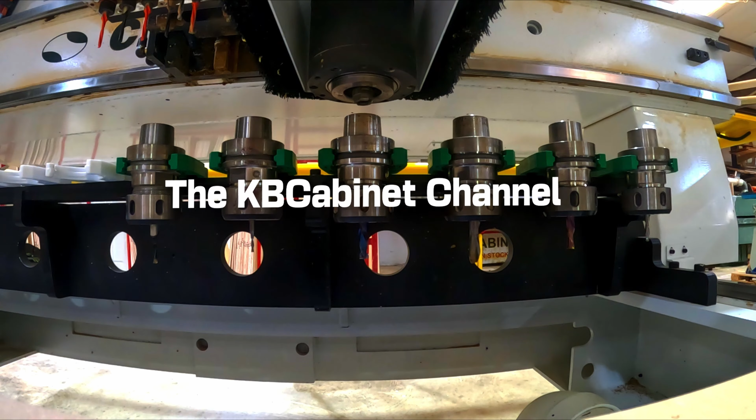When it comes to MDF doors, the shaker style is no doubt one of the most prolific designs out there, and that's for good reason. It looks nice and it's relatively simple to set up, but eventually you might come to a point where you want to offer a little more to your clients than just the simple shaker door. That leads you to start adding new tooling to flavor it up, so to speak. So in this video, I'm going to walk you through how I set up an inner bead, or inner rollover, whatever you want to call it, on the inside of an MDF shaker door. I feel like it's the next logical, technical progression, without getting too crazy.

We're going to take a standard shaker door and just add a little profile to the inside. So with that being said, let's take a look at the tools that I'm going to be using.

First one right here, we've got a diamond blade hogging tool, and this has been a fantastic tool that I've been using for a couple years now. I purchased this one from Dylan over at Mid-America Woodworking Machinery, and I've just been really happy with it. So we're going to use this to do our main hogging.

To get our shape in the center, we're going to be using these two tools here, and these are both from Vortex, and they need to be bought together. They're made to work together, and I believe these actually come from the raised panel kit, but I'm not using the actual raised panel part of it. We're just using these for the inner bevel. The reason these have to be bought together is because this one goes first and starts removing the bulk of the material, giving it the shape, and then this one comes behind it with the nice point and cleans it up. There's probably other tools out there that will accomplish the same thing. I just happen to be using Vortex tools because I have them on hand.

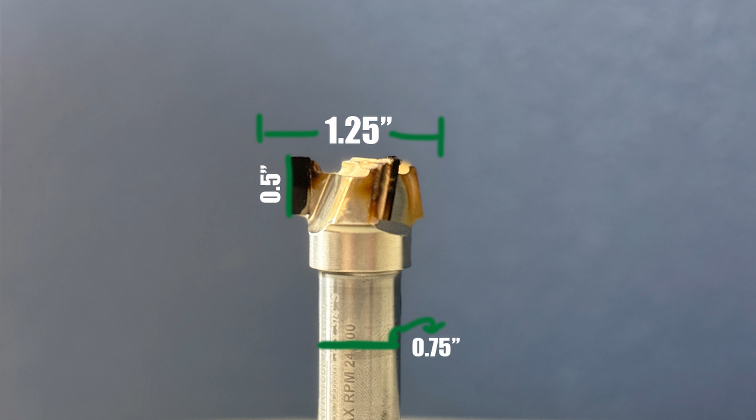So inside the tool shape editor, I'm going to admit that I do not like this. I feel like it's kind of unintuitive, but we're just going to do the best we can. So here is our tool, and I'm going to throw a picture up on the screen. You can see that if we take a look at the tool, we've got 1.25 inches in diameter, and then we've got a 3/4 inch shank, and our tool height is a 1/2 inch, or the blade thickness of the blade is a 1/2 inch. So how do we recreate this inside this tool shape?

Currently, if we look over here, our grid unit is set at 3/16, and that means these are 3/16 by 3/16 squares. So what we're going to do is change these grid unit sizes a couple times to accomplish what we want. The first thing we're going to do is tackle the width of this tool.

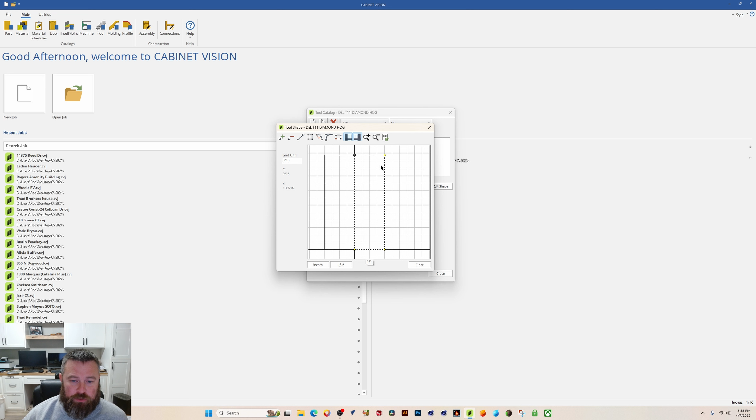So what we're doing here is we're only drawing the right side of the tool, and then Cabinet Vision will apply that to the left side. So if our overall diameter is 1.25 inches, if we come over the radius of that, which is 0.625, I believe. Let me look at my trusty metric conversion data.

So 5/8 of an inch. We're going to come over 5/8 of an inch, and we're going to make these squares, 5/8 by 5/8 squares. That gives us our diameter, and if we add this right side to the left, we will get our 1.25 inch diameter. So right now we're already good with our diameter. So now we need to come up a 1/2 inch because that's the thickness of our blade.

Let me just check something real quick. If I change this to 1/2 inch by 1/2 inch, we can see that this stayed at the 5/8 point, and I believe it's because when we put in the tool diameter here, that is driving where it initially starts out the width.

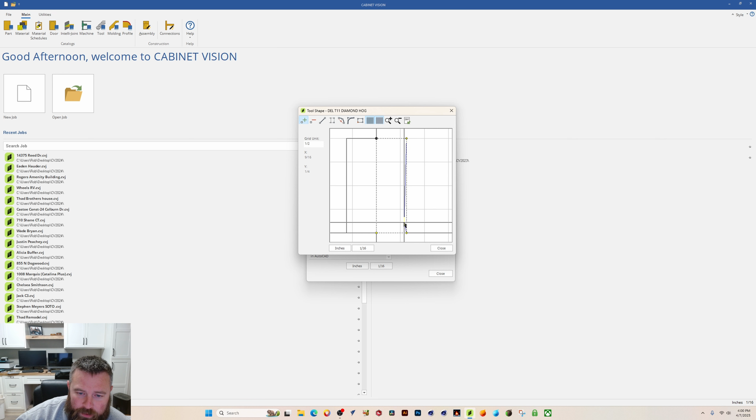Now we can add a point here, you click the dotted lines, and it allows you to add a point. We've got to turn off this snap to grid, because it's going to want to snap only to the grid points, and we don't want it to do that. So let's put that about right there.

That is the height of our tool blade. Now we need to come back this way half of the shank, which is 3/4 of an inch. So we're going to come over 3/8 of an inch, so that is 0.375.

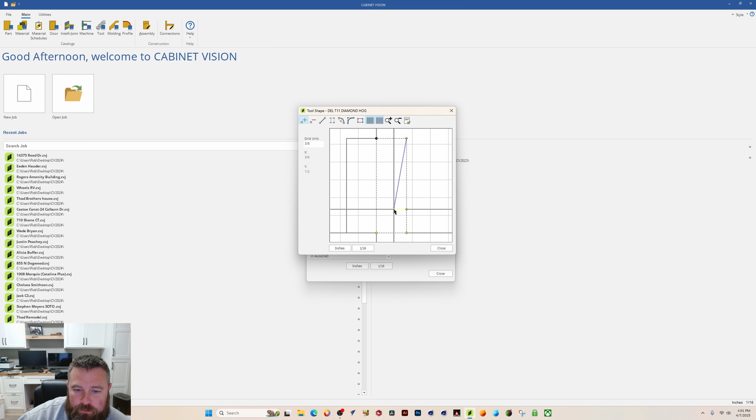If we do that, now we can come all the way to this point here. So let's do just like that. And then let's move this guy in line just like that. And that is pretty much it.

It's pretty straightforward when you're doing these square shapes. It can be pretty annoying, but if you experiment with it and mess up, just hit close and say no to this save tool shape, and you can start over. But in this case, we're going to say yes. And we have our tool shape that's pretty accurate for the diamond hogger, and we can use this in the simulation.

So now that we've got the hogging one out of the way, let's move to the 1/8 inch end mill, and we'll get that set up. So let's add this 1/8 inch end mill.

So again, we're going to create a new tool, and I'm going to name this DEL, so I know to delete this after. This one's going to be T5 because this is going to go in tool slot 5 for me. And then I can put something like 1/8 end mill, something very simple like that. So when I look at it, I know it's T5 and it's an 1/8 inch end mill.

So for type, again, we're going to go to flat router and we're going to hit OK. Same deal as before. So the only things I've got to change, I've got to put 5 for my tool number, 5 for my height offset ID. Diameter, we can do 0.125 for 1/8 inch.

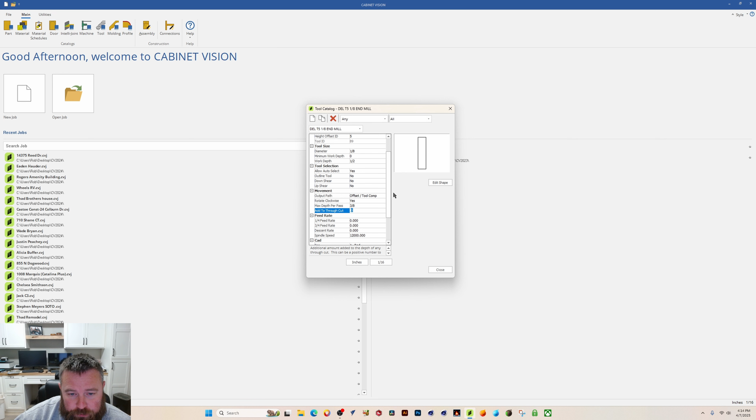So the feed rate here, for this first one, we're going to do 150 for the 1/4 inch, and then we're going to cut that. Actually, we're going to go 10 for the 3/4 inch feed rate, and then I'm going to do 75 for the descent rate, and then I am going to leave the spindle speed at 12,000 RPMs. Again, I'm not going to do anything down here.

So if we edit this shape, let's do, if we make that an 1/8 of an inch, or actually let's make this a 1/4 inch.

What do we say? This is an 1/8 inch end mill, so actually 0.0625. We need to make this a 1/16. Okay, so if we change this to 1/16 grid unit, we can see that we're good here, and we're good here with the other 16th.

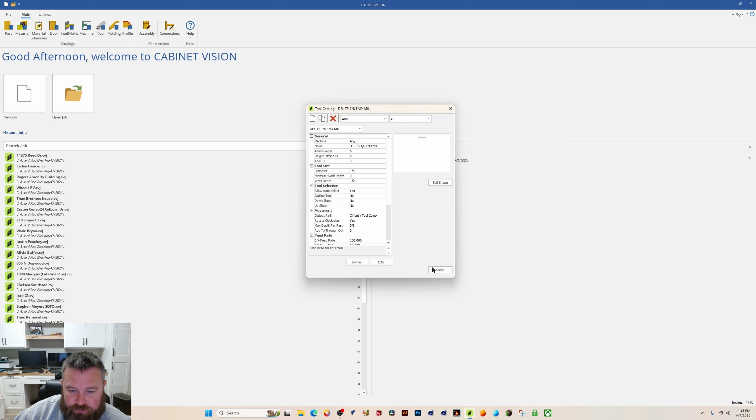So we actually don't even need to edit that shape. It's fine just the way it is. So we're gonna close this out, and now I guess we'll bring it back up. Now we're going to go to the shape tools, and we're going to start adding these tools that are a little bit more complicated shapes.

So let's add one of the shape tools. What we're going to do, I'm going to come to the internet here, and we're going to add first, we're going to do this guy first. So this is the first of the shaping tools, and so it's the 7964. So if we come back into Cabinet Vision, let's create a new tool, and I'm going to name this.

Start out with delete. This one is going to be T9 because it's going to be tool 9, and we're going to go ahead and put, I'm just going to put the tool number for this one. So it's tool 7964, and I could even put something like this, like vortex. Maybe I should have put vortex before to break up the two numbers, but that's good enough for now.

So let's go to type, and we're going to go to shaped router, and we're going to hit OK. All right, same deal as before. I'm not going to do anything here. We're going to put tool number 9 here, tool number 9 here.

The diameter of this tool is actually, I'm going to go 30, it's in millimeters. I know it's 31 millimeters, and then in inches.

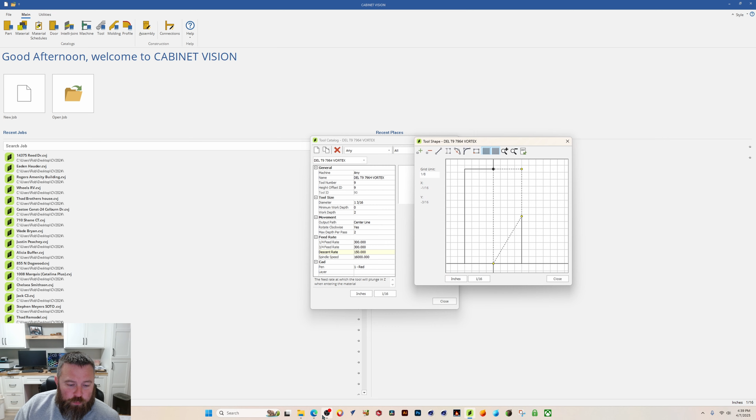If we go to the internet and we go back to this tool on vortextool.com, we have this product drawing and dimensions PDF. So we're going to pull this guy up, and we're going to kind of have this help us a little bit. We've got some information, like we've got the radius here, and I think it gives us enough to get it mostly done. The only thing that I don't see is it doesn't really give us a radius for these little notches right here. So I don't know if I'm going to worry about that too much or not.

So to start, if we come back into Cabinet Vision, let's think about this a second. We're going to be jumping back and forth to this page into Cabinet Vision, so I apologize for the back and forth, but it's just easier for me to look at this and then jump back into Cabinet Vision. So the first thing I want to tackle is this guy right here. If we're coming down our center line, let's do this guy right here.

So if we have 0.466, and that's from here to here. If we go 0.233, that should get us this little dot here. So let's go 0.233. I'm going to go to this grid unit, and I'm literally just going to put in 0.233, and let's add a point right there.

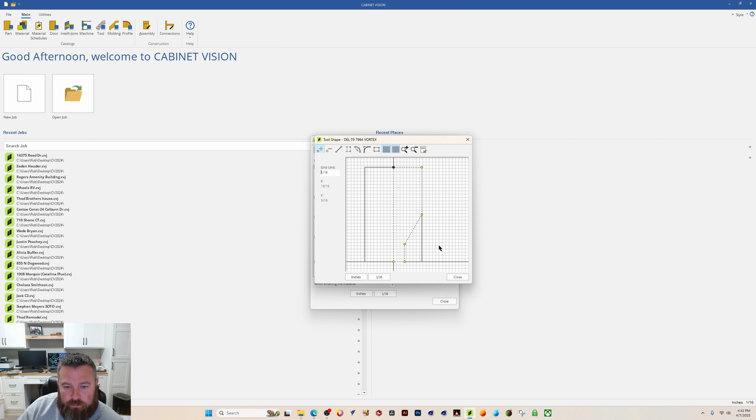So from here to here, we're at 1.216, so we need to cut that in half. Let me whip out my calculator on my phone. I'm literally just taking 1.216 and dividing it by 2, and that gives me 0.608. So if we come to 0.608, just like that.

Now if we create a new point, just like that. Okay, so how do we get that radius? We're going to come up here to radius point, click this point, and type in 0.375. We're going to hit OK, and there we go. So that is giving us that radius.

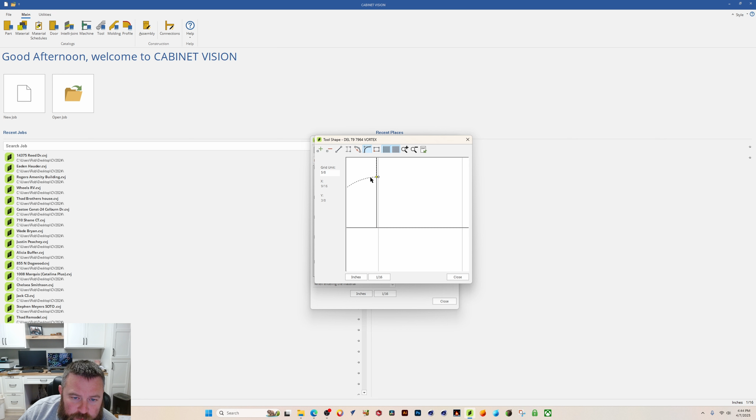And it looks like, let me zoom in on this a second. I couldn't tell if that was a point or if that was just part of that radius. Okay, so we've got that radius.

So let's go back here, and we've got this little radius here. I don't really know, it's not giving me a radius, it's not really giving me a distance. So we could get away with either not doing it at all, or we could kind of guesstimate. And again, this is for like an X simulator, so it's how accurate you want to be in the simulator. But if we try to put this in, let's say this point, 1.281 is from here to here, and then this point, 1.216, is from here to here.

So let's take that point, or that's that 1.281, divide that by 2, that gives us 0.6405. So if we come back here and we put 0.6405, then we know how far we need to come over, but it doesn't really give us a height to go up. So I'm just going to do an arbitrary number that looks like it might work, and we can move it.

We might have to zoom in a little bit here, and then let's add another point here. Well, let's... and then we'll move this guy over here, and we can give this guy—I don't even know how much of a radius to give it—0.05 maybe.

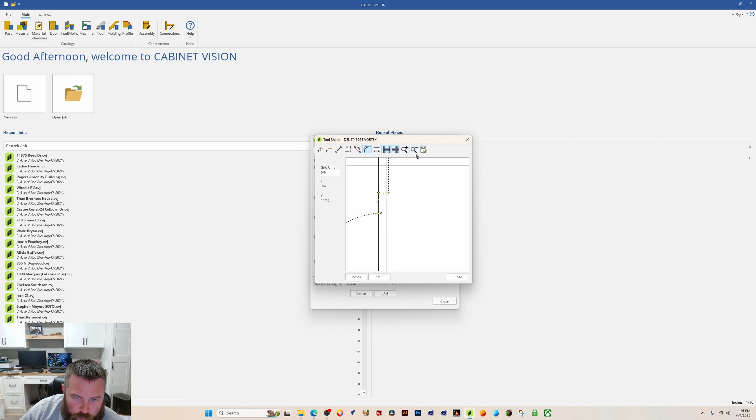Let's see what that looked like. Maybe that was too much. That looks like it might work, I mean that will be pretty close. So we're gonna roll with that.

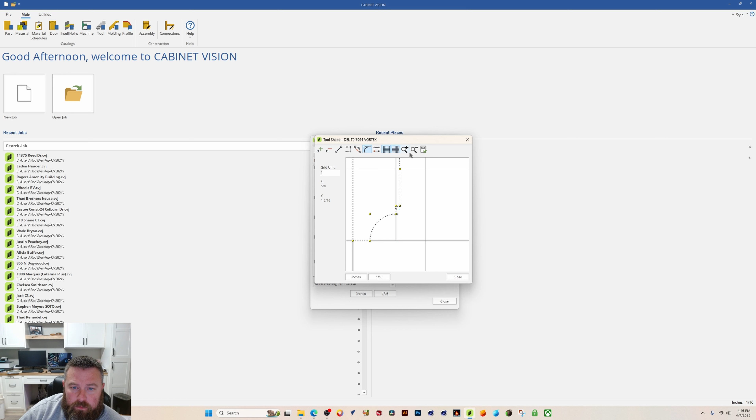So now let's go back and take a look, and we can see that it comes up about an inch or so, 1.009 from this point. I'm not going to worry about it too much, I'm just going to put an inch on the grid unit, and we're just going to call that good.

So what I'm going to do is put this guy right here, we're going to do another point like that, and then I'm going to move this guy above it like that. Okay, I don't know why it put that point, but I'm going to remove that point.

So this is a lot of just tinkering. I like to think there's a quick and easy way to do it, but it really is just a lot of tinkering. So now if I close this and save this shape, we can look to see that it's definitely not perfect, but it's pretty close. I would say it's a pretty accurate depiction. I know we've got this radius correctly, we've got the diameter, and we've got the radius here.

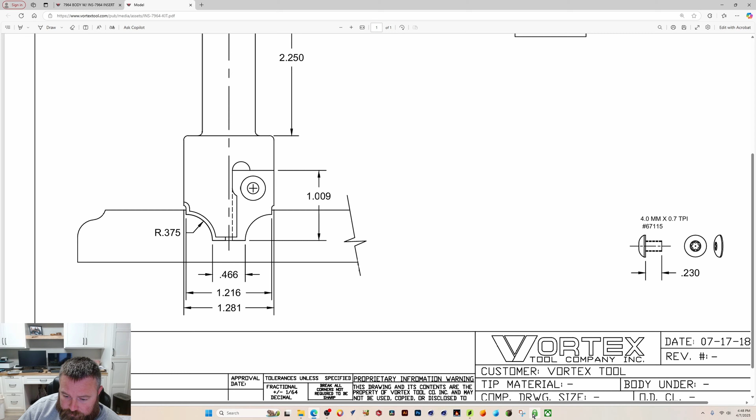So we've got enough, it's accurate enough that I'd be pretty confident this would work out. We could go in and tweak that a little more, but I'm not even going to worry about it for this. All right, let's move on to the next shape tool.

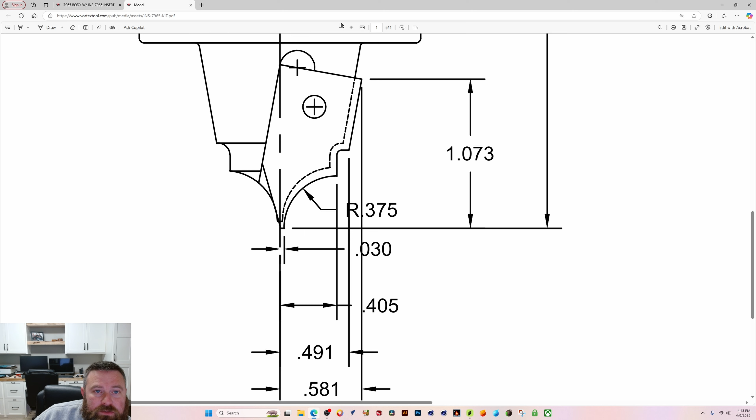Now we're going to take a look at getting this guy into the library. This is tool 7965. Again, we're going to come down here to the product DXF or PDF, and let's take a look at what we got. So we got the whole tool here, let's zoom out just a little bit. All right, so we got some information to work with.

So let's go ahead and create a new tool and quickly give it a name. We're going to put DEL, this one's going to be tool 8, and we're going to call this Vortex. And this is 7965. Let's make this a shaped router and click OK.

Let's quickly go down the list. This is going to be 8, 8. So the diameter, I'm going to go with this 0.581 because we're only cutting with this shape. Maybe this is a radius, I don't know, I really don't know. So this 0.581 is what I'm going to use.

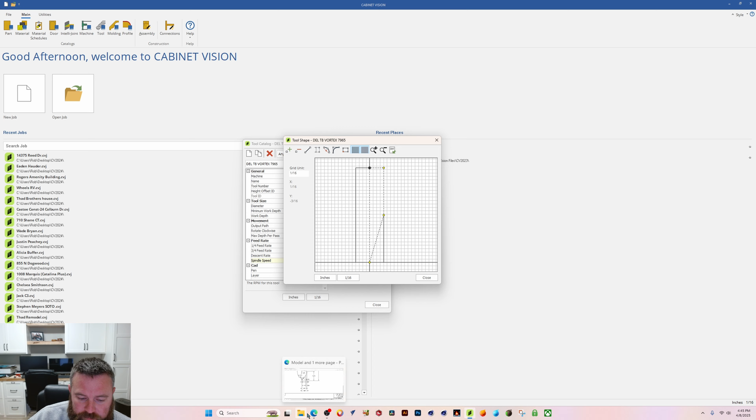So it looks like we've got some dimensions from this tip here, so I'm going to start at this tip and we're going to work our way to the right. The first thing I'm going to do is take this 0.030, and we're going to zoom in on it. This is where I wish this thing went full screen, it is just frustrating that it doesn't. But let's add a point right at this grid, we just basically want one grid space over, and that's going to give us our little point.

So now that we have that, we have this radius of 0.375, so let's go here and put 0.375. And I'm going to turn that off, let's zoom in. Well, let's see if we can kind of zoom in on this region.

Maybe that was good enough. So I'm basically going to add a point, and let's go right above it at that line of 0.375, just like that. And then I'm going to go over to the right to this 0.4, or right here, is it this guy? So is it this guy? And right here, I think this one is the 0.405, so let's go 0.405.

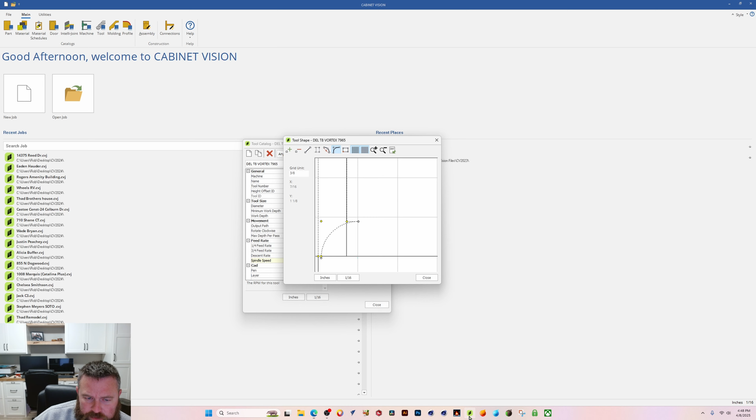All right, so we've got this, we've got the radius, and then now we need to come up, and then we've got this little radius here. I don't know how high this point is, I don't think. I don't see anything, but we know from here off the center, maybe it's that 0.491.

So I guess I'm just going to kind of guesstimate maybe 0.125 distance to go up. I mean, I guess I could get calipers out and go get the tools and measure this distance, but I think for this I'm not too terribly worried about it. Let's say that this is maybe like a, let's see if we can deduce like a 16th or something. Maybe I will have to get calipers eventually, but I'm just going to kind of say like a 16th for now, or maybe even like an 8th.

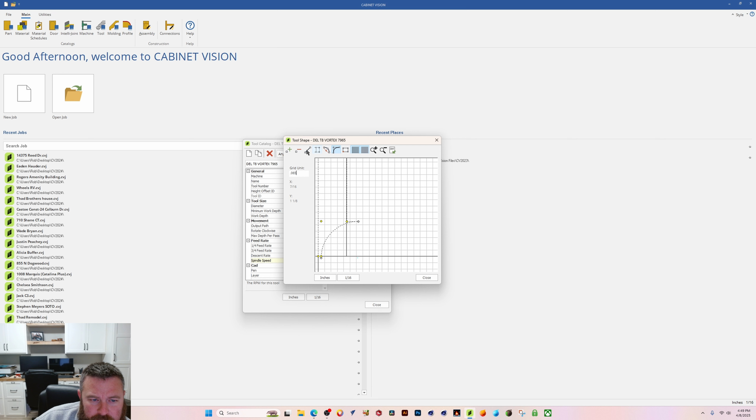Let's go back here a second. So let's just do like a 16th. Maybe. And let's take...

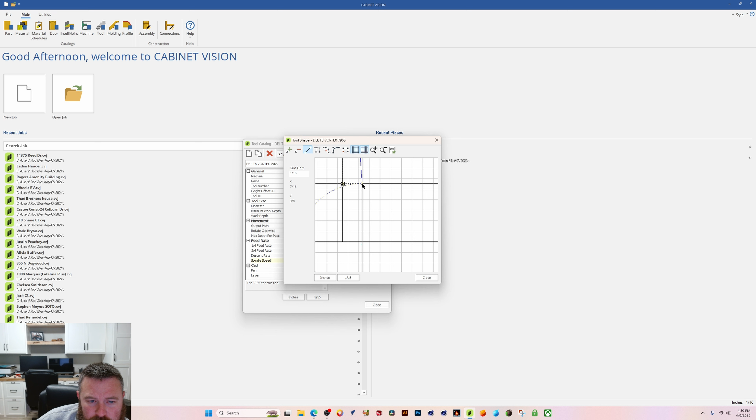Okay, so how am I going to do this? I think here's where it gets a little tricky. I can't really move this point, I think. So let's move that guy to there. It kind of overshot it when I did the radius, so it was going to move it wonky. So I moved that point out to it, and now—no, I keep zooming in and out, it's probably confusing. So now let's add a point, and let's just go like right here.

Maybe right on that line. Well, I keep adding a point when I'm doing that. We want to move this point, we don't want to add. So just keep that in mind. Yeah, every time I click that with the plus, it adds a point. Okay, so let's just keep that for now at that 16th.

And then if we come here, I know that right here, so 0.491 is the distance from here to where the edge of that is. So let's come here, let's go 0.491. And let's zoom in, and let's add a point right there.

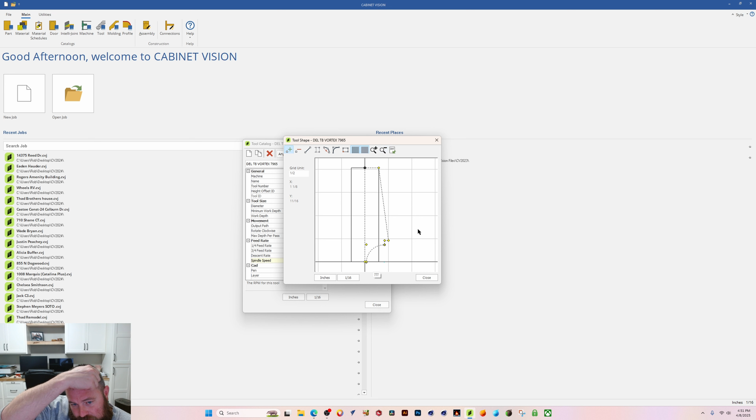And if we zoom out, maybe that's not quite tall, maybe that needs to be taller. So let's actually, I'm going to move this up just a little bit. Again, I'm not ultra worried about this shape. I mean, once we start running it, we're going to really figure out if we're close or not.

So then now let's put a little radius on this guy. And again, I have no idea what to put, so let's put like 0.05 maybe, something like that. I think that looks pretty reasonable.

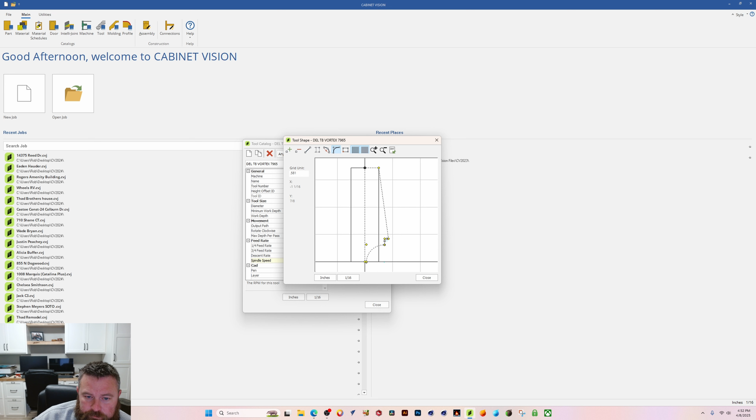And if we go—so the last thing I got to do, we're going to do this point, so 0.581 first. So let's put 0.581. And we know that we're going to come out.

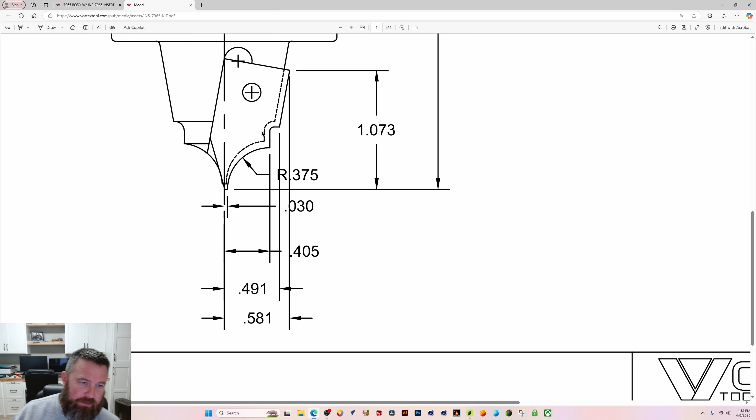Let's add a point. Okay, let's just do this for a minute so you can kind of see my reasoning. So we know we're going to come out like that at the angle. But, you know, I guess I would need to get calipers, maybe I should have had calipers to do this. I'm making this video because maybe it looks like I don't know what I'm doing, and I probably don't for the most part.

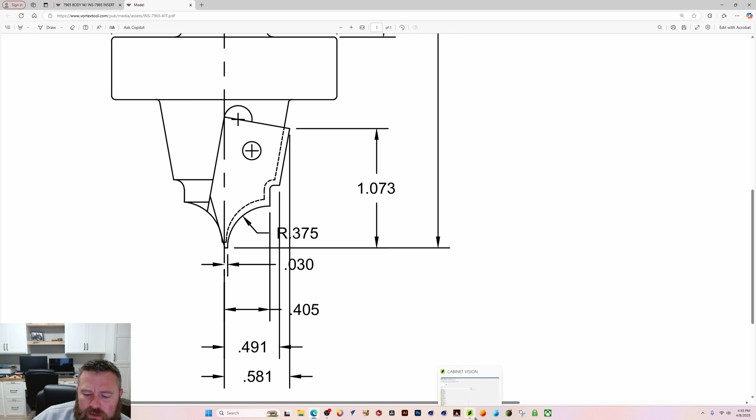But let's just say that this, if this is basically like an inch, maybe this is like a half inch. Maybe that's just straight, we're just going to call it, we'll do this—let's go 3/8, maybe.

And actually, what I need to do, I actually need to leave it at that 0.581 so I know where I'm at there. So we'll just lower it on this line, maybe. I don't know, something like that. I think that's going to be good enough for me.

And then what we can do—so I'm not even going to go into, there's no need for me to really design anything beyond the point that we're at. So to finish it off so it looks nice, maybe we just come in like...

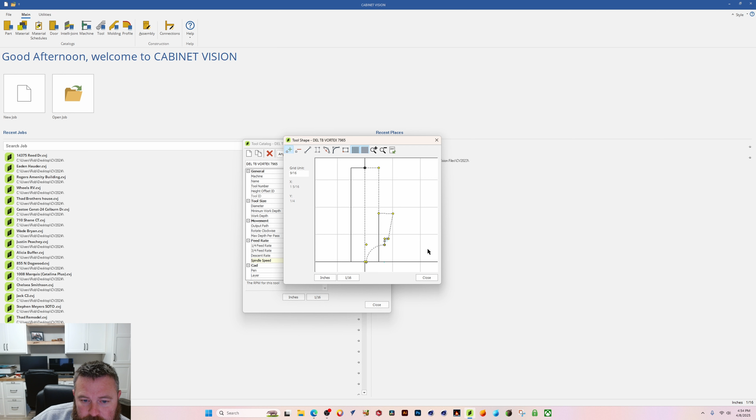So we could do something like that, and then if we close and save it, we can see that more or less we have the shape of our tool, and we've got that little tip there, and then we've got that little...

So I think between tool 8 and tool 9—tool 9 looks really close, tool 8 I think that looks really close, and in fact it's more than close enough for us to get started running it in the real world, and then we can make changes that way. So I think we're good.

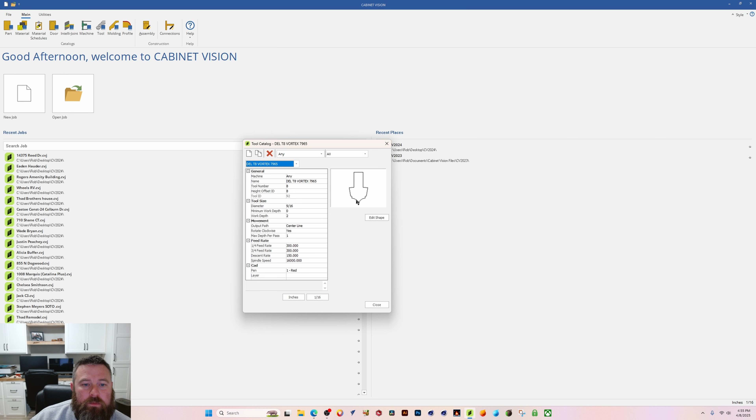So now we've got all the tools in. The last tool, I'll cover it—I'm not going to put it in since I already have it in. It is my T4, that 3/8 compression, this guy right here from Nick Frost. I'm just going to throw this one in for the sake of time on this video. This is the information I have for this compression, so I'll just go slow if you want to pause the video and look at it.

These are my feeds, my speeds. These are what I use day in and day out, and I wear these mofos out. So if you're running a similar machine, this ought to get you pretty good results.

So now that we have all these tools in, we can move to creating a tool set. Let's start making this tool set. Before I get started, we're going to come up here to the tool and open up this catalog. But I just want to reiterate that this is something I just came up with that worked for me from trial and error. So if any of you pros are out there, don't beat me up. If it looks funny or if there's a better way to do it, this is just what I have found that works for me.

Secondly, there's a chance that I might run into this little bug that I have recently discovered setting up a tool set. So if it does show up, I'm going to show you what I found to work around it, but it may or may not work for you.

So let's come up here to create a new tool first, and we've got name and type, just like we did when we were setting up the single tools. For this one, I'm going to name this delete, and then we're going to do, actually this is not V groove, let's do shape. I'm just going to name it something so I know to look back, video test. The name is just irrelevant, it's just for me so I know to go back and delete this. But whatever your name is, name it very specific so you want it to be memorable and make sense.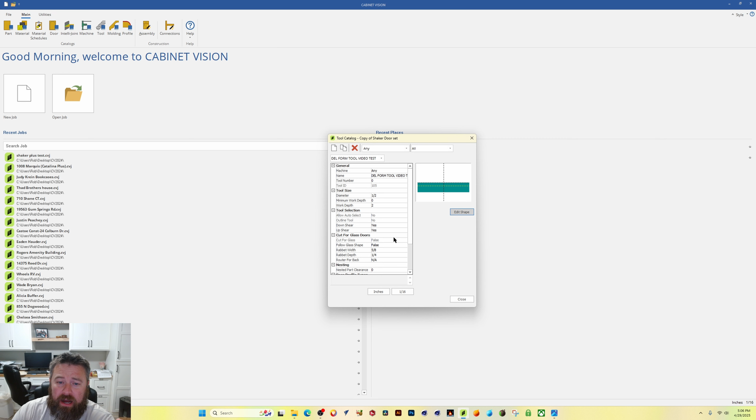Before we start adding tools, I just want to talk about the different ways that you can go about this. So when I did this the very first time, I did not use simulation that is built into Cabinet Vision. So when I first did it, I would make a change and then I would have to run it and then analyze it and make adjustments. But we're going to use simulation.

So to see if you have that under your license, you have to come up here to the little question mark, go to license details, and if you see simulation down here, then you have access to it. If you do not have access to it, it's not the end of the world at all, but it just can save some time getting it set up in the simulation.

It can save some time from running back and forth to the machine, so we're going to use it, but you do not have to have it. It just makes life easier. So if we go with this form tool video test, we can start building out our set.

The first thing we're going to do is add a new tool. So we're going to click this, and it'll just throw in a random tool, or a tool that may be what you want, or it may not be. From here you can drop down and select whatever tool you want from your library. In our case, it is exactly what we want.

So we're going to use this one. For the sake of time, because I know this video is long, I went ahead and made some notes from a set that I already know works. I'm going to go through these, and we'll check out the simulation in between each tool, so even though I'm not doing it entirely from scratch, because that would take way too long, you can get an idea of how to go about this.

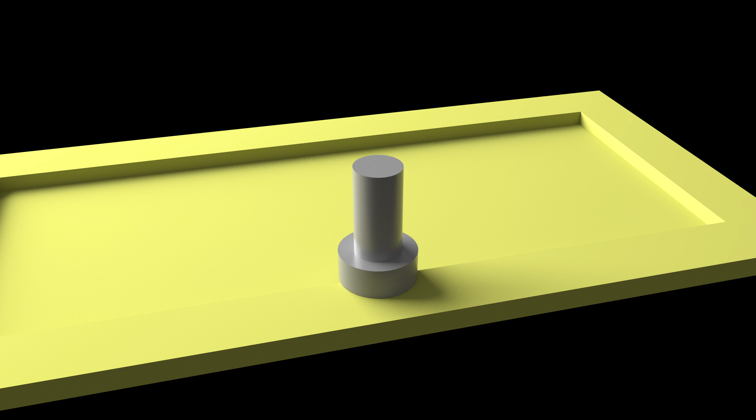So the first tool we want is this Diamond Hog. It's going to ask us some stuff over here that we need to tell it. First thing is the offset. This center line, whenever we bring this router into the world — I'm going to have a little 3D video here that hopefully helps you see where this is coming in the process, in 3D space.

So for all you visual learners out there, you can get a sense of how we have to offset this, because where it stands, the center line of this tool is lining up with the edge. It's in line with the ledge or the edge of the shaker profile. Obviously we have to move that over, in a specific direction.

If you've never done this before, I encourage you to just start putting some numbers in there to see the way it's moving. So if we move it a half inch, it moves to the right. If we go -.5, it moves to the left. If we zero it out... you can do the same for all those other ones so that you get a sense of how you're moving it.

So we need to offset this. We need to offset it to the left. How much do we offset it? Well, if we think about this logically, we want basically this edge to be over here, so we need to shift this to the left. And we are going to shift this guy to the left 11/16. That is what I use currently.

The reason there's a gap here is because this is not right on the line — as we add tools, it's going to take material off, and so we're having to account for all of these things. So we're going to use -11/16 for the offset, and the depth on this, we are going to come down 7/16.

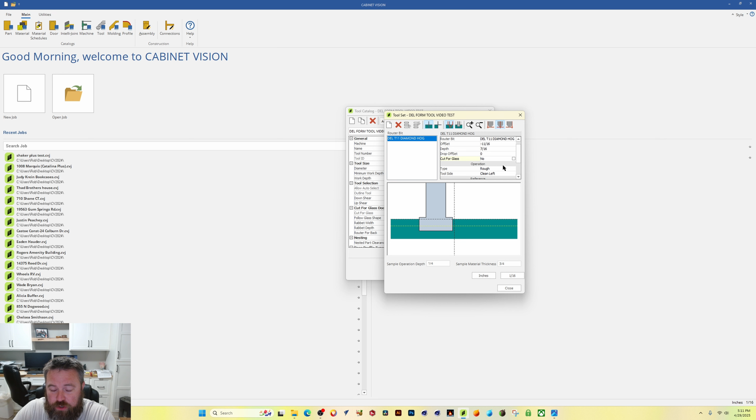Hopefully that makes sense. So on our drop offset, we're going to leave that at 0. We are going to say no for cut for glass. Operation, this is going to be a pocket, and immediately this turns gray, symbolizing that we are going to take out all the material to the left of it. Then we want our reference depth to be a fixed depth because we want it to go the depth we're telling it to, so we don't want any calculations beyond that.

So if we hit close for a minute, I'm going to close this, and we're going to just take a look in simulation one by one for each tool, so you guys get a sense of what it is we're doing. So if we go to cabinet, let's go to door — I've got my MDF shaker here on our route path. This is where I'm going to select this DEL form video.

When that error was coming up, even though I had a tool set, it was not displaying in this drop down. So I sent Cabinet Vision over all the documentation of what's happening. Whenever they get back to me and we get a solution for that, I will make an update video.

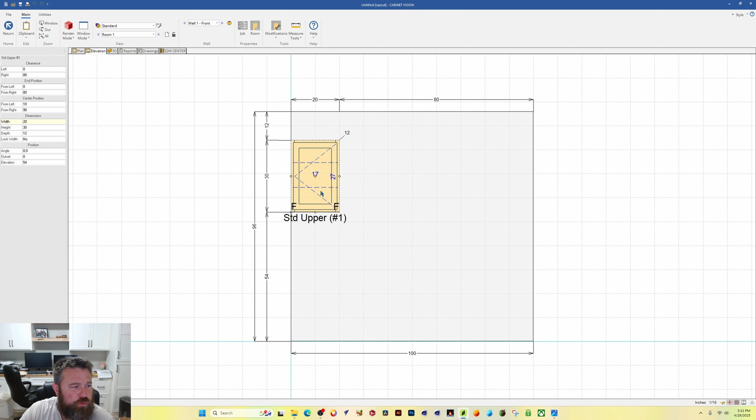Okay, if we click OK, let's go ahead and just throw a really quick cabinet in here. Object, custom cabinets. Let's just do a wall. And I'm going to make this something simple. Single door, we'll just do 20 by 30.

Okay, so I'm going to go ahead and save this just in case Cabinet Vision crashes, because sometimes it does here lately.

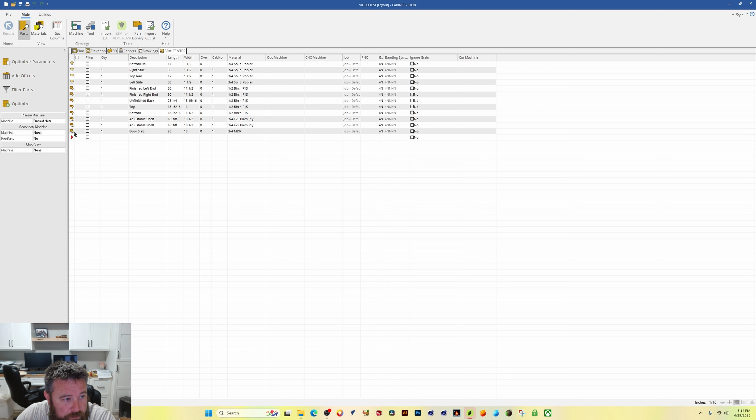All right, so let's go ahead and jump into Screen to Machine Center. And when we go to the X simulation, we should only see tool 11, or that hogging tool. All right, so we are in Screen to Machine. I'm going to check this box, and I apologize if I'm talking fast, I'm just trying to move through this. So if we hit run, I've got that selected, we're going to run that. Let's take a look at what we got.

So here is where, if you have machine simulation under your license, this is where it's going to show up. And if we click that, it is going to pop up the simulation, and we can see it's pocketing out, which is what we want. So we can look down here at the bottom left, and you can see the tool that it is calling out, so you can double check to make sure it's calling out the right tool.

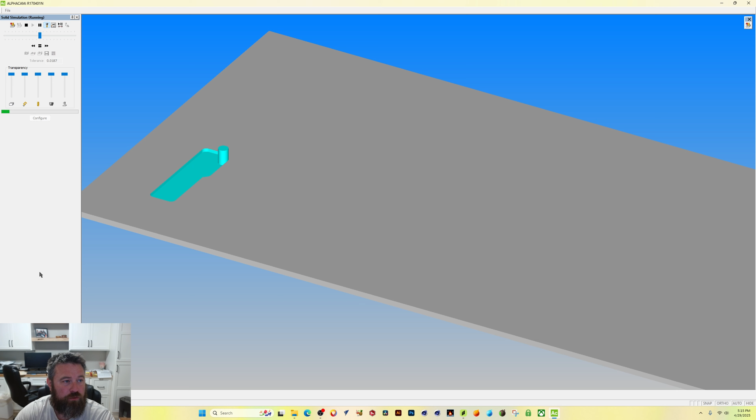And let's go ahead and speed this up. All right, so we can see that it is doing exactly what we want, and it is just the hogging, so it will maintain the exact form of that tool. So it's not going to do anything beyond that.

All right, so let's exit out of this, and let's go back into our, we got to save this, and we're going to have to close out of it. You might be able to do this inside of Screen to Machine, but I always close out of it whenever I do any of the changes.

So let's go back into that DEL form tool video test that we have, and we are going to add in another tool, and this one we are going to use tool number 9. All right, so this is the tool we're bringing in, and I don't... oh, that's just the edge of that. I was like, what is this little thing down here?

Okay, one thing to keep in mind when you're doing this, it is very important the order that you bring these in. And you can move them around the order tree here, but I've got 11, and I need this to be at the top because I want this tool to be first. Now I want this tool to come in behind it.

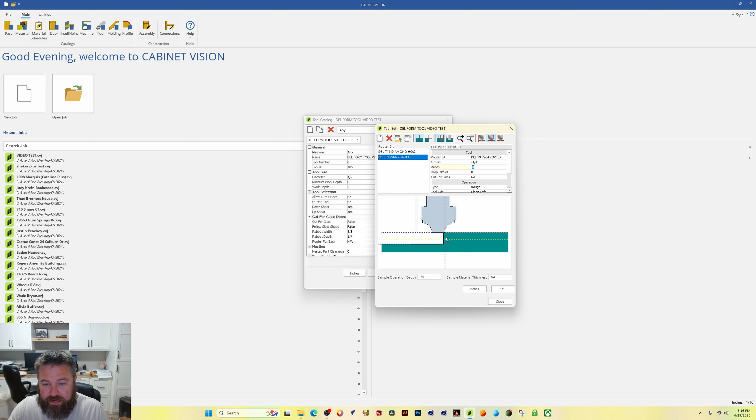So the same deal as before, we have to come in and start giving it offset, depth, and an operation type. So this guy right here, we are going to offset this guy -1/4 of an inch. All right, and so if you can kind of see, we need to get the entirety of this blade in.

And again, we're just kind of getting a good base going, and then we're going to run it, and then we can make any adjustments. But we need to make sure that we are clearing some material off. So that's why I'm going 1/4.

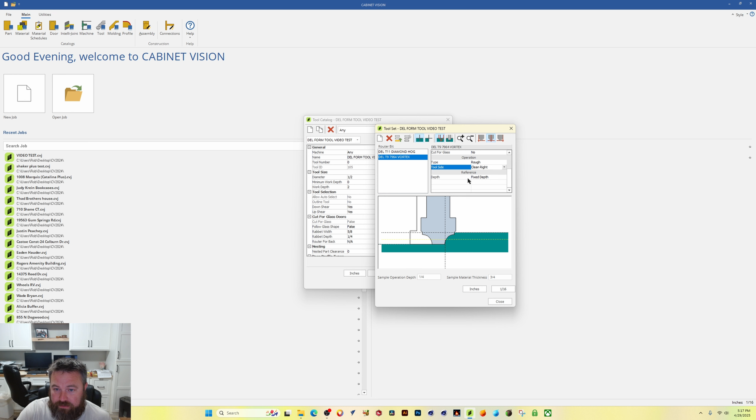The depth, we're going to still go the 7/16. We are not going to do anything on the drop offset, the type. We are going to do this one's going to be a rough pass, which means it's going to go all the way around in a line. And we are cleaning up the right side, so we want that right side. Well, the tool's cutting on the right side, so we need clean right. And at the same time, we're going to leave the reference at fixed depth.

So now if we close that out, let's go back into the video test. We've got to save it, and we're going to have to update the doors, I believe.

Okay, so now if we go back into Screen to Machine and we run that same process, we should see after it calls the tool 11, it's going to call tool number 9, which is the rough, the first shape of this profile we're doing. Okay, so we're going to go back to that door slab, we're going to optimize again, and let's go back to the machine simulation and see if it... Might have to click that first so it knows what to simulate. All right, so let's speed it up.

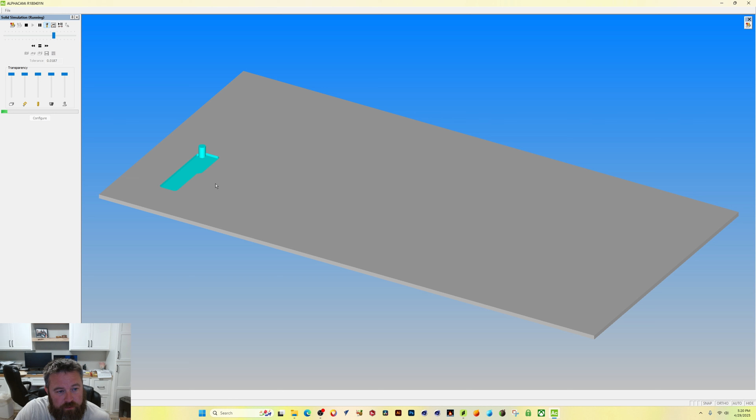All right, so it looked like it grabbed that tool, T9, so that looks pretty good. And the accuracy of this 3D shape goes back to when we set it up in the tool. So that's where, if you're using simulation, you want to be pretty precise with how you set that up, because it'll make your life easier in here.

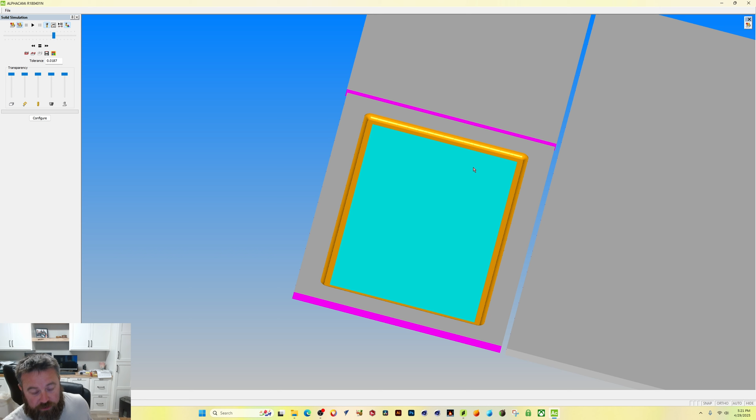And just to reiterate, if you don't have simulation, this is where you would go out and run a test part. You just don't move it, you leave it there, and then rerun it every time you make a change.

So let's go back into, let's go to cancel, save. Let's go back to our tool set, and all right, now let's go ahead and add in T8. This is the tool that's going to give us the finishing, it's going to finish this shape out, so I'm going to refer to my notes here.

And this guy on the offset, we're going to do this negative 1/32 because that's what I wrote down on my notes. But we're going to move it over. Negative 1/32. We're still going to go the same. 7/16. Actually, we don't want that, is 0. Here is 7/16, just like that.

And this guy is also going to be rough, also clean right, and also fixed depth. The reason for the offset, the idea here is that you want the tip—this tool comes to a pretty fine point.

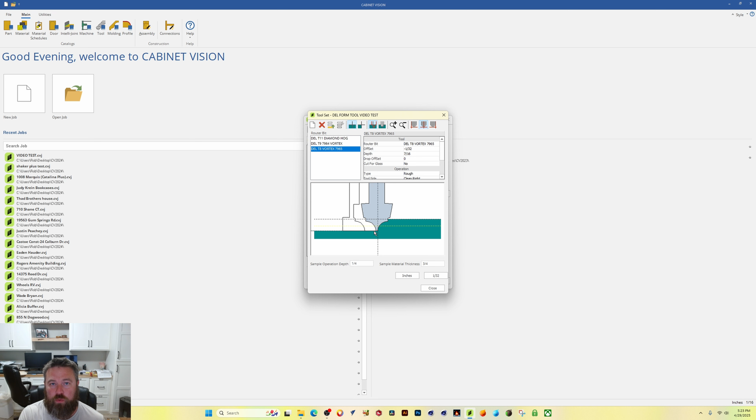So you could start if you're doing this again and you have no clue what you're doing—if you started wherever this guy is and dropped it down right where the last one ends, you could start out with the same offset, like -1/4, and then drop it right down where that one ends and then run it. You'll be like, okay, well, I need to move it over a little bit more to the right to clear material again. So nothing wrong—if you don't know what you're doing, you can drop that right down where the last tool left off, and that'll give you a real good idea of where it's landing in the real world.

Okay, so let's go ahead and close this out.

I know this is a lot of back and forth. I apologize, but I'm trying to do this in a way that you guys can get the most out of it, because I spent a lot of time trying to figure this stuff out. So I guess I'm trying to tell you guys all the things that I wish someone told me when I was first messing around with all this stuff.

All right, so back to the door slab. We'll optimize. All right, speed this up.

Oh, that looks good. So now we've got our finishing pass. And what it's showing here is that, in the computer, as it's going around, there's going to be a little bit of material left in the corners. But from my experience, that stuff gets knocked off in reality, and if there is a little, you can hit it. But I think that's pretty good. Again, this is all a starting point—we're trying to get to the best possible starting point before we go out and fire the machine up. So that looks good.

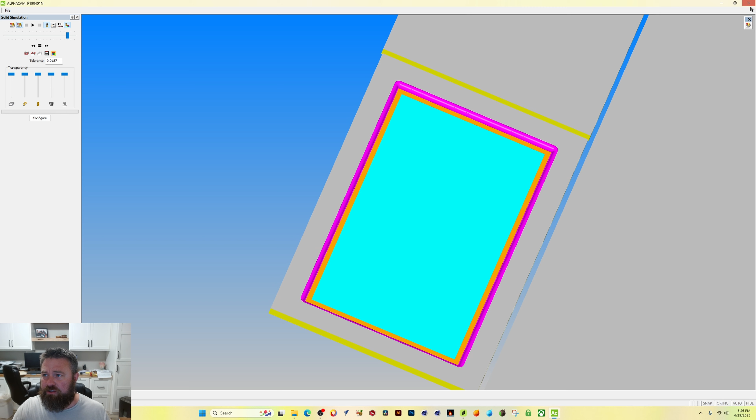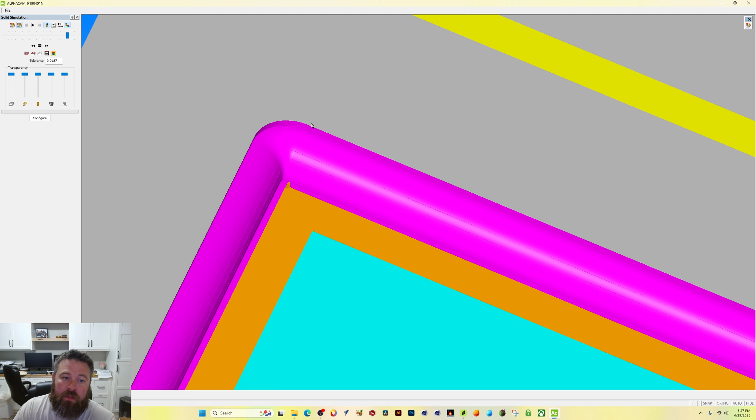So let's go. Okay, before we move on, let's kind of talk about where we're at. We've got the main hogging done, we put in the pre-shape tool, and then we put in the final tool, or the second shape tool. Now down here, the corners look probably okay, they're passable for sharpness. Up here, we don't want these rounded corners, right? So we can definitely work to clean these corners up a little bit, and that's what we're going to do now, using that 1/8 inch end mill to do it.

So if we back out of here, save this, and we're going to close this again.

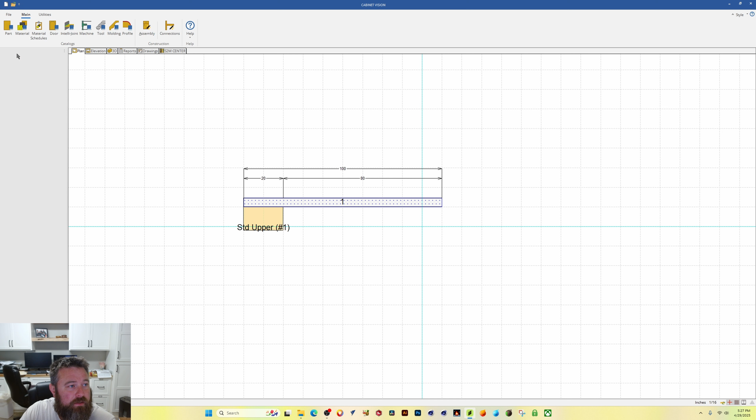Everything's been running really slow here lately. Let me just see if I can restart this a second. I don't know, the 24.4 just seems to really choke my machine up. I've got a pretty decent computer, but compared to the last Cabinet Vision, this one just runs a little slower.

Okay, that seems a little faster, so hopefully that helps. So what we want to do now is edit the shape, and we're going to drop in this DEL Tool 5, this end mill, and we are going to use this guy in the corners. We're actually going to use this guy twice, two different sets.

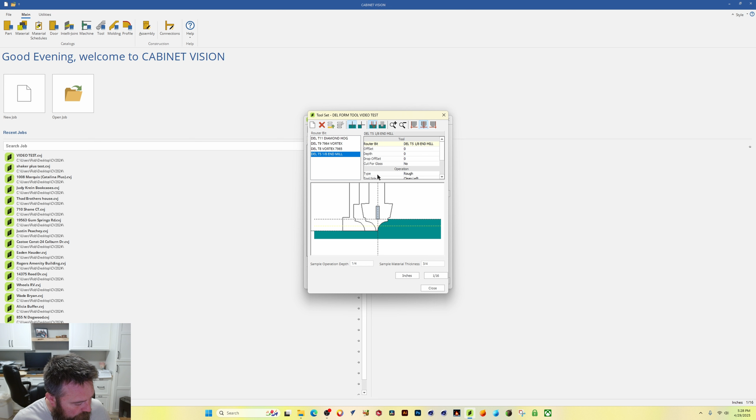So let's set the first guy up, and we are going to offset this guy 3/8. And we are going to go a depth of, I think a 16th is what I have, so 0.0625.

And we are going to use this guy as a cleanup. The radius to clean up after largely depends on the diameter of your hogging tool. That radius is what the hogging tool leaves behind to get. An easy way to do this, if you don't know what it is, run a piece, take a ruler and draw a line to where if the corners were sharp, and then you can see all what you would have to clean up in order to get that clean. Hopefully that makes sense.

But on this guy, we are going to clean up after a radius of 5/8. We're going to use that. We're going to stay fixed depth. Let's close this guy out. Same deal. I'm just going to update.

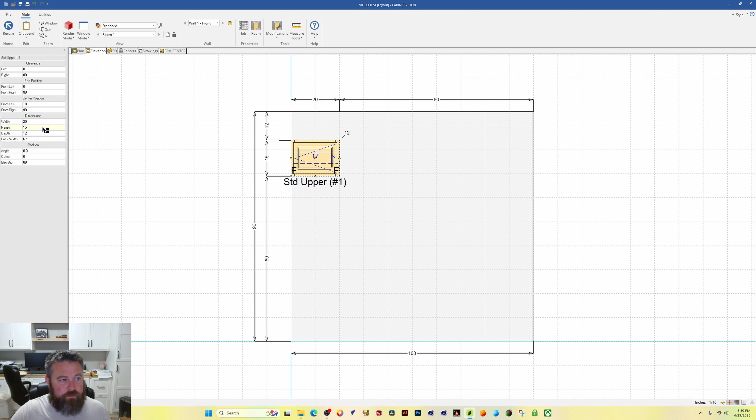Just to make sure, I'm actually going to shrink this. Let's do 15 by 15, just to speed this thing up, because we're going to run this and I don't want it to be too big. So let's go back into screen to machine. Let's get this door slab again and optimize it.

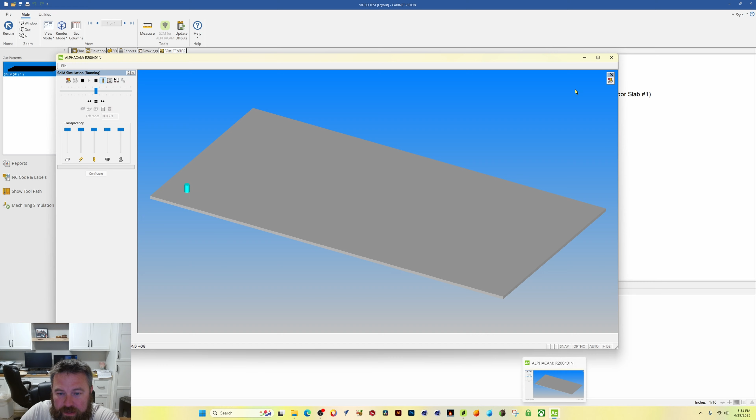So let's see what this cleanup on the 1/8 inch does. Let's zoom in here and speed this up. And I'll try to slow it down. So I'm going to try to slow this one down a little bit so you can see what we're doing.

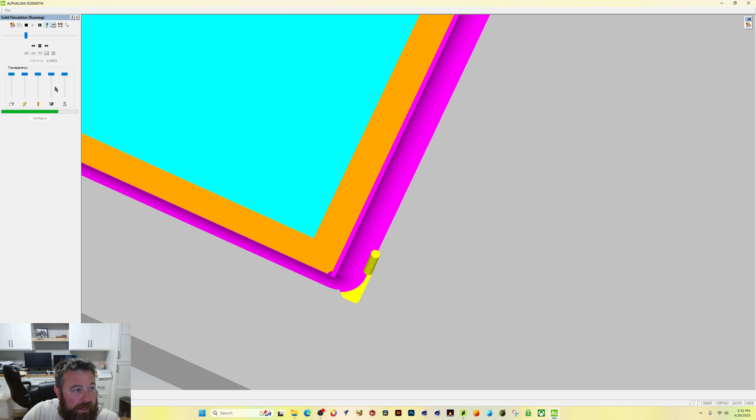Okay, so here is the cleanup, so you can see what it's doing. It's basically going into the corners, going in like a normal cleanup pass, and it's just sharpening those corners. That looks really good. The only problem we have now is that it leaves us this little edge here, and that's why we're gonna do another one to clean it up.

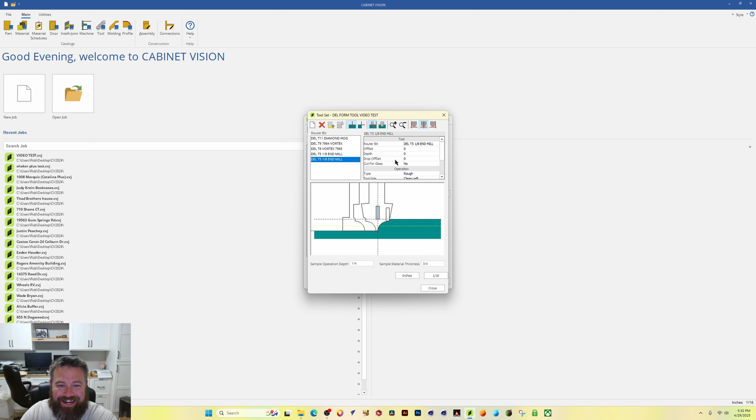Let's go ahead and do that. Let's save it, let's close it out. We'll go back to this DEL form, and let's go ahead and add another one. This guy, we are going to offset him 3/8. So the same offset there, and I think we're going down the same depth. We're going to leave it at a rough pass because we want it to travel down the whole inside. We're going to leave it at a fixed depth, and we're going to hit close. That is all we're going to do there.

Let's go ahead and update this. Save it just in case she crashes.

I did talk to one of the engineers working on hopefully the next version of Cabinet Vision coming out. They said they have greatly improved, or the screen to machine is supposed to be greatly improved, and the loading time will be so much less than what it is now, because it is a problem, and it doesn't really matter how fast your computer is, it still seems to take forever. But good news is the new version should be fixing some of that, so we'll just have to see what it does when it comes out.

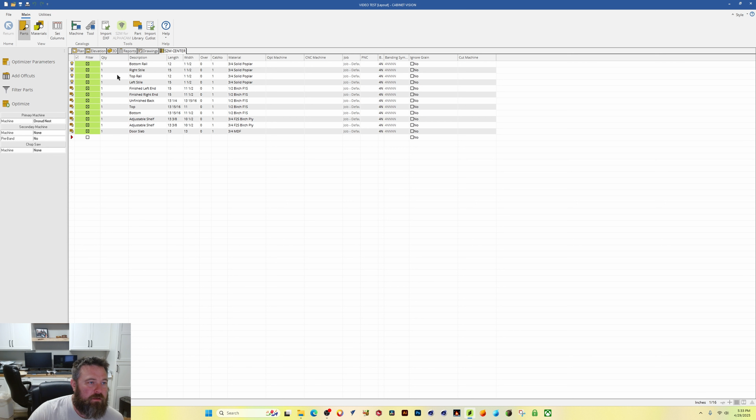Okay, so door slabs, same deal, optimize. Okay, machine simulation, so let's see what this... Okay, so let's speed this up a little. And what we're going to see is that once this guy's done, he's basically going to travel around the inside just like that.

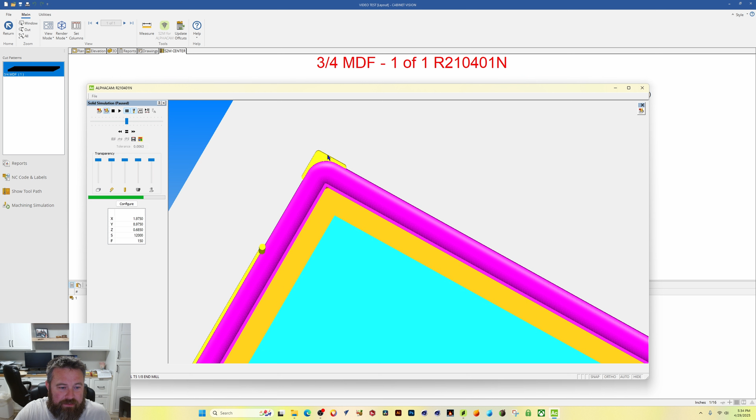If we pause it here just a second so I can zoom in so we can see what it's doing. So it's basically just traveling along and going to get it nice and clean. So in theory, whenever we run this, we should have a relatively good looking door profile, and we're going to go run it and see after this.

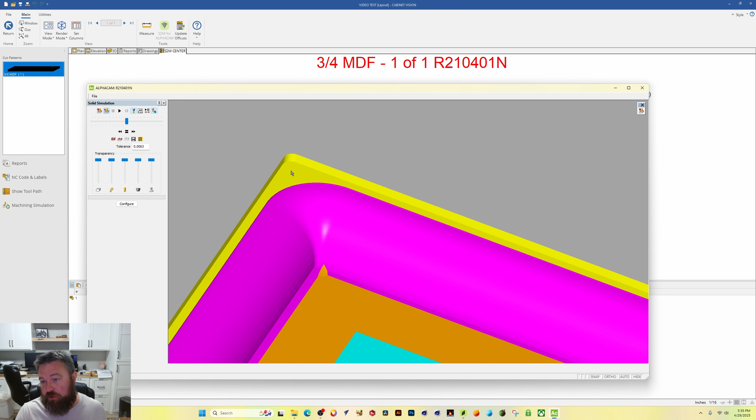And again, this is where you're gonna have to probably run it once or twice in the real world to see, do I need to make some minor adjustments here. And then again, you have to balance the changes you want to make inside of Cabinet Vision against the changes that need to be made on the machine side, just depending on how accurate your tools are over there. So it's just all the stuff you have to keep in mind.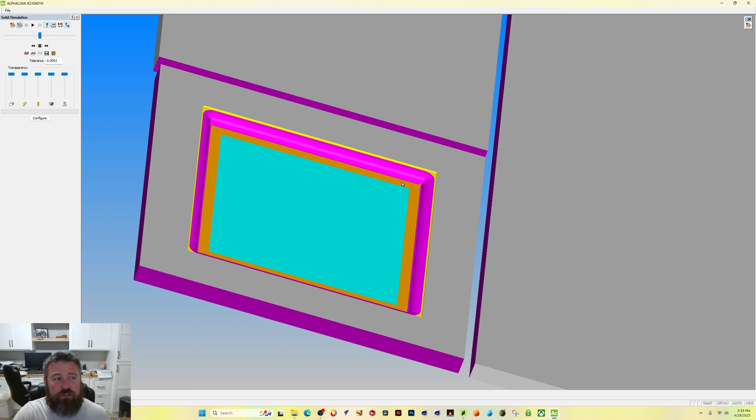But I think we're at a really good point, and hopefully this shows you the power of simulation, and how you can pretty much get to this point without even going to the machine, which is a great starting point. It's easier to make changes and jump back into simulation than it is to go out and run actual parts. So you don't have to have it to get by, but it definitely makes life easier, at least for me.

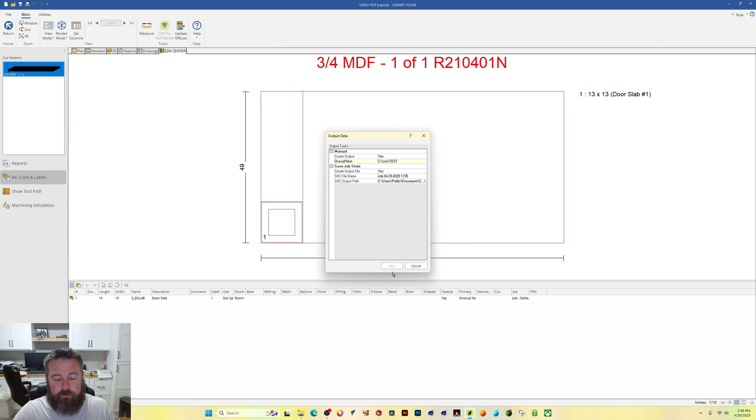Now that we have this, let's get this ready to run as a test. I'm just going to put test right here, and we're going to generate some code. I'm going to print out this pattern sheet so I know what I'm looking at, and then I'm going to throw this code out to the machine.

And we are going to go run it. So we've got the code in the machine, and I will see you out there at the CNC, and let's go run our first test and see how close we land.

So right as I was coming out to the machine to run this part, a thunderstorm decided to show up, and unfortunately my roof is tin metal, so I apologize for the noise and flickering lights, but I did not see any lightning, so we should be good. I'm still going to try to run this. I've got my scrap piece of board here, so let's run this test. I'm going to fire the machine up, and we're going to see what we have on our first pass.

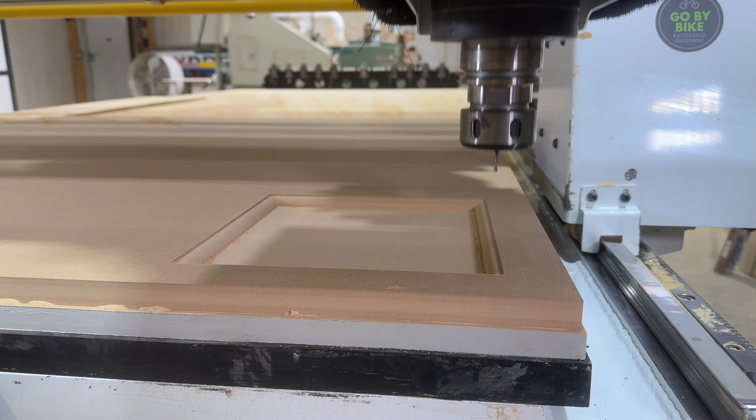Got this guy ran, and overall it came in close enough that I could use this pretty much as is, and send it off for sanding and get it painted. Obviously I have done this setup before, so I knew the numbers to plug in.

However, the same process that I showed you is exactly how I went about it when I first set it up to begin with. So even though I might have skipped over a lot of the trial and error, moving stuff, tweaking, making small changes, hopefully this gives you a pretty good idea of what it would take to start experimenting on your own, because once you do, I think you'll find it's a lot more fun and not as hard as you realized.

But I do want to mention a rookie mistake that I made when I ran this. I forgot to push this all the way up against my indexing pins, so this did not come out square, unfortunately, but it did bring up what I want to talk to you guys about as far as getting your thicknesses on your stile and rails all the way around.

So when I initially did this for real the first time, I focused on getting it to this point where I knew the profile was good. Once I got to that point, then I measured my stiles and rails all the way around, and I had a number I was shooting for, which was 2 and a quarter inches, and I would measure what I had and weigh that up against where I needed to be to get it to 2 and a quarter.